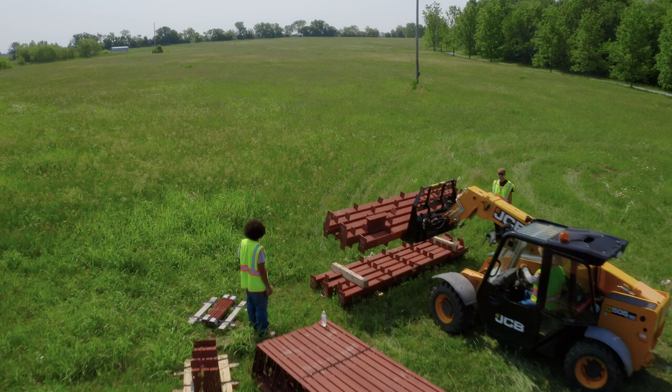Congratulations on taking delivery of your new Worldwide Steel building. We know how excited you must be to assemble your building, and it's important to pay extra attention to the next few steps to ensure your assembly goes as smoothly as possible.

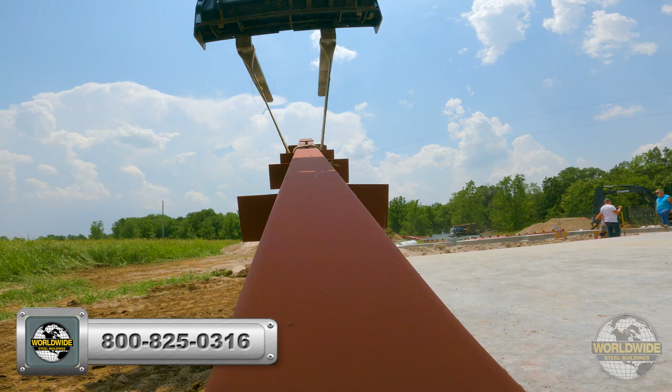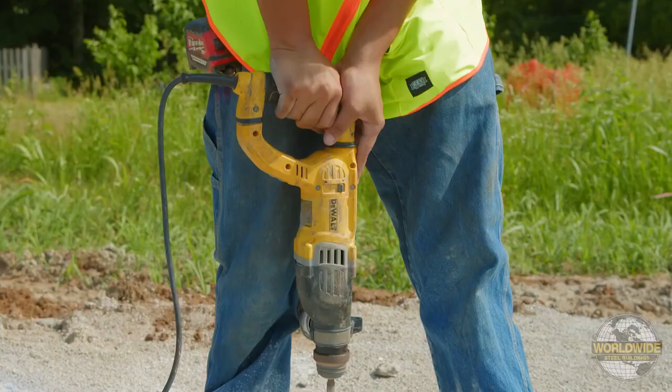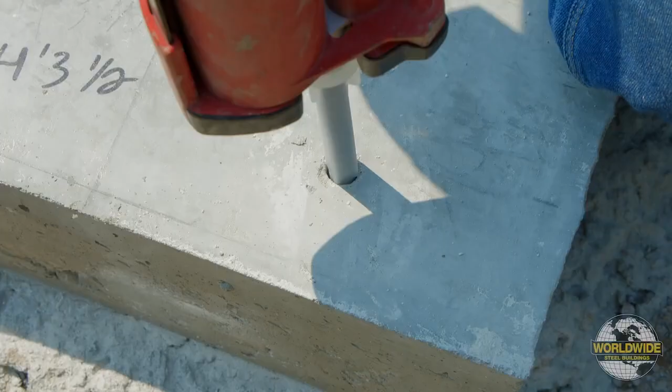The foundation is a crucial step in your building process. Your foundation engineer, whether it be Worldwide Steel or your independently contracted engineer, will determine the diameter, length, and type of anchor rod you'll need to use. Worldwide Steel does not provide anchor bolts for your project, and these must be supplied by you or your contractor.

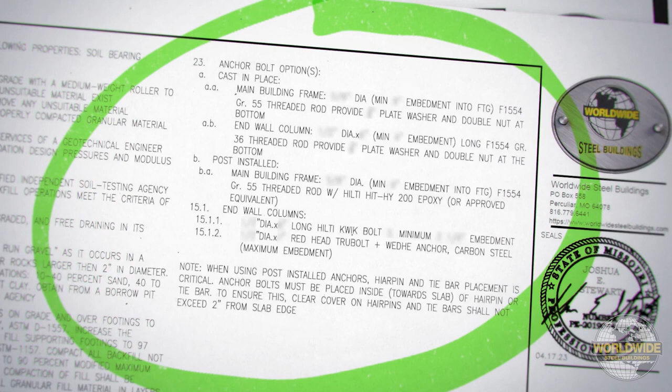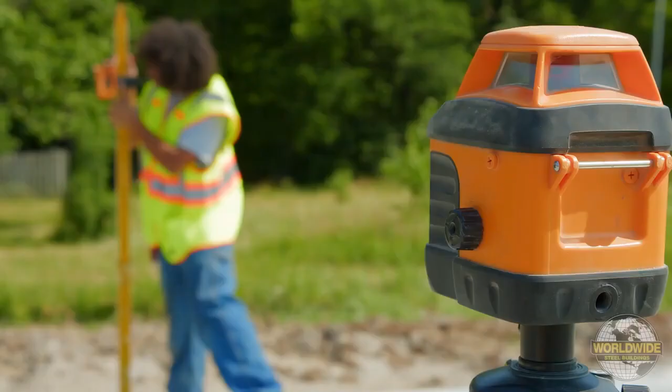For most building projects, you'll have the option for your foundation supplier to cast the anchor rods in place when pouring your concrete, or to install anchor bolts after the concrete has been poured. Your custom building has been drawn and engineered for a square and level concrete pad and/or piers. Problems with the foundation will lead to problems with assembly and poor overall building performance, so please ensure your foundation is correct before assembly.

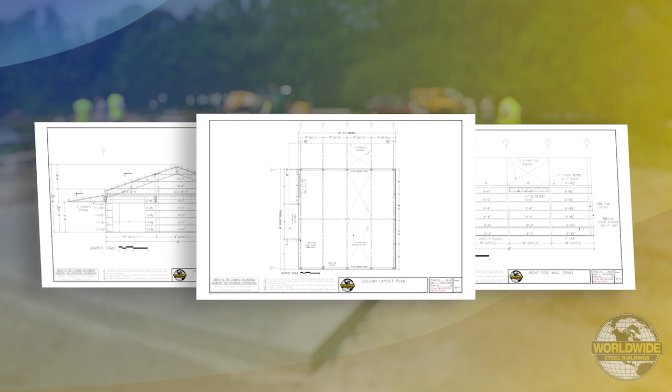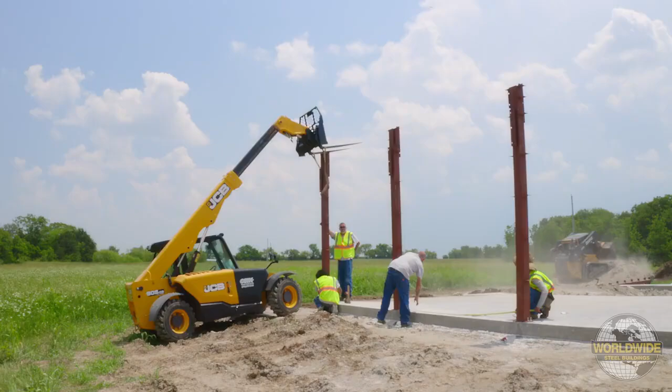The paperwork delivered with your building has all the information for the layout and components of your specific building. Remember, all buildings are custom-made to how the customer designed it. In this example, we're referencing a 40-foot by 40-foot tube leg building with post-installed anchor bolts. All buildings are drawn on a grid system, or grid lines as they're commonly referred to.

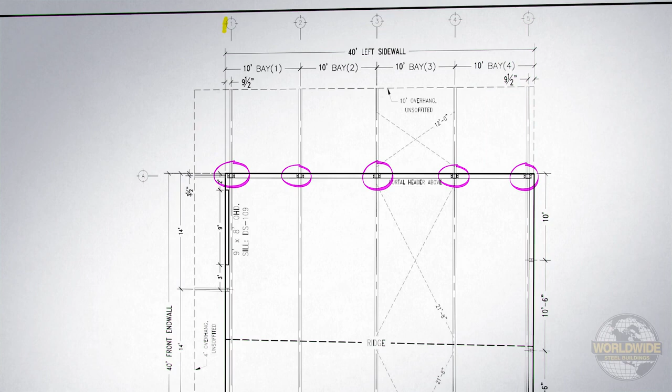When laying out your columns, the W1 drawing, or column layout plan, will give you measurements for proper column placement. Columns are labeled at the intersections of the truss lines, the numeric value highlighted in yellow, and the column lines, the alphabetic value highlighted in green. The trusses in your building kit correspond to these intersections and are labeled accordingly.

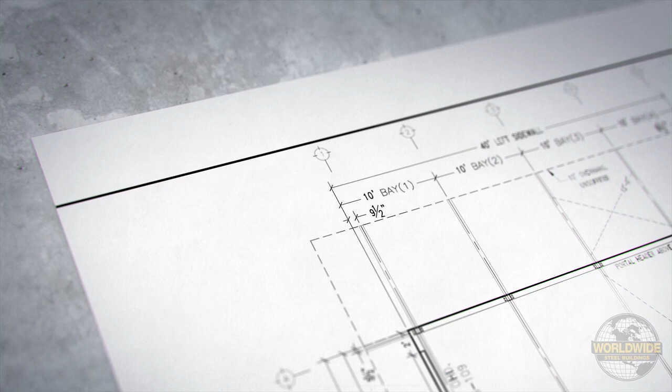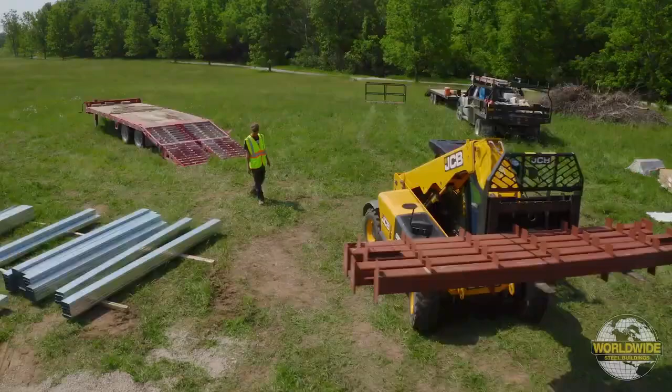The dimensions and grid lines shown on this W1 drawing represent the center line of the columns and base plates at each location. Columns that are specific to a certain grid location, such as grids A and 1, will be labeled as A1. If you receive columns with no labeling, those columns are typical and can be used at any main building column location that does not have a specific labeled column.

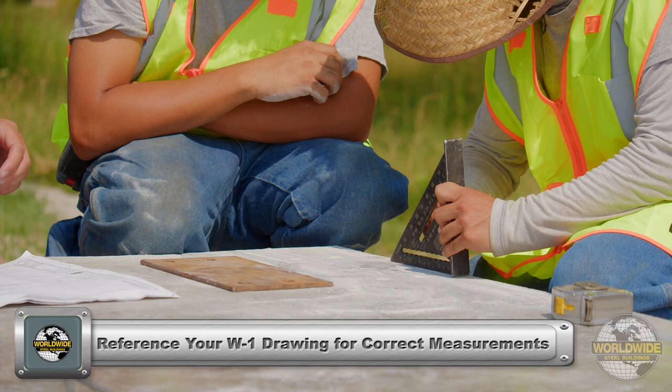For the building in this example, the measurements are as follows. Measure 1/2 inch off the sidewall edge of slab and make a mark. This will be the outside face of the tube column as well as the outside edge of the base plate. Measure 3 1/2 inches from the sidewall edge of slab and make a mark. This will be the center line or grid line of your tube column from the side wall.

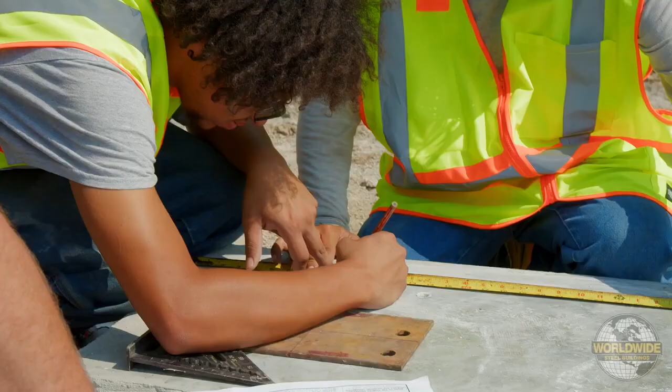Measure 9 1/2 inches from the end wall edge of slab and make a mark. This will be the center line or grid line of your tube column from the end wall. You've now identified center lines in both directions for column A1. Repeat this process for each of your building corner columns.

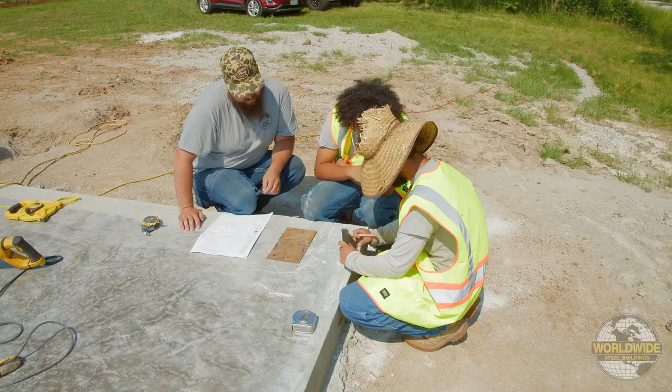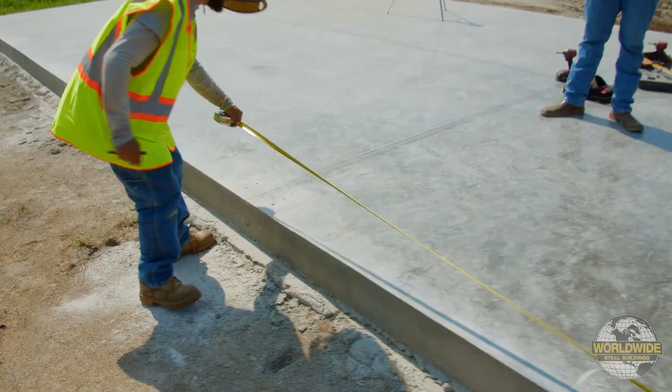To find center for the remaining columns, run a chalk line along the side wall at the 3.5 inch measurement at each corner column and snap the line. Then measure from the center line of the corner column to the center of the next column line. Per our W1 drawings, this building's dimension from 1A to 2A is 10 foot 0 inches. Mark this location on the concrete.

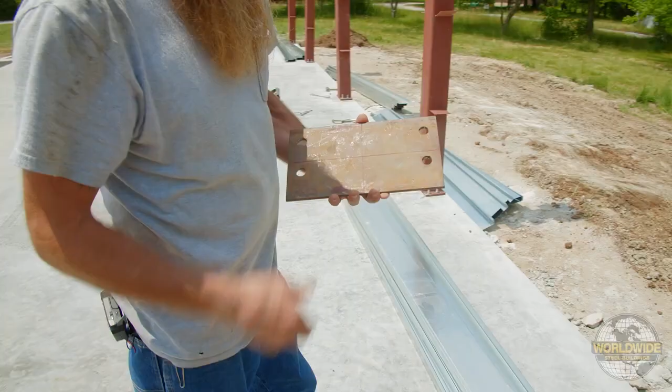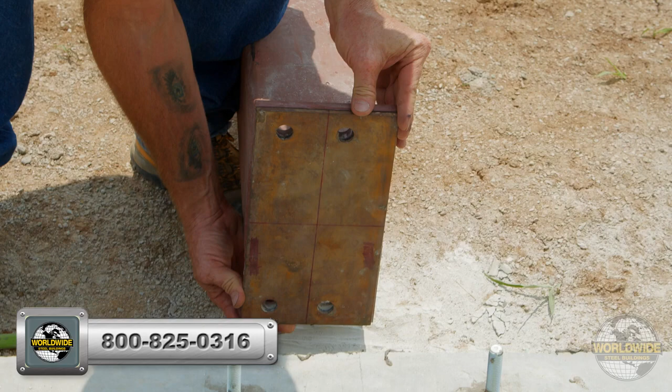We encourage the use of a template for accuracy when laying out your anchor bolt locations. Worldwide Steel does not provide this template, but it can be easily made out of plywood to match the base plate dimensions and hole locations shown on your foundation drawings. Once your measurements have been pulled, align your template to center and mark where your anchor bolt holes should go. The anchor bolt holes will align perfectly with your column holes.

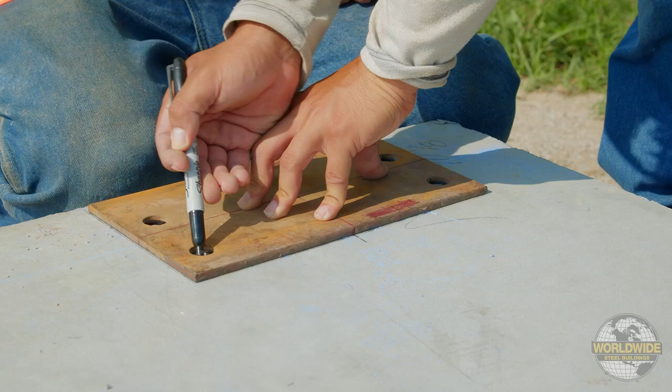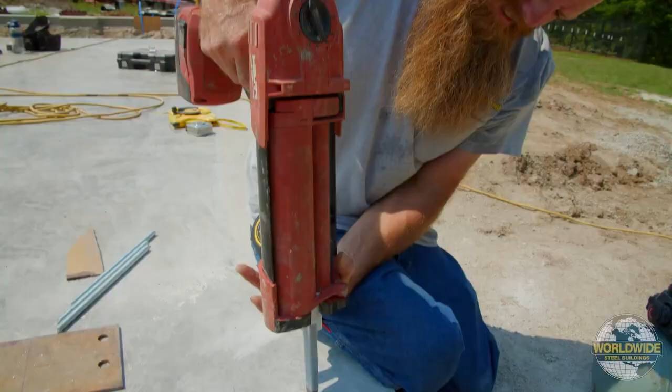At this time, remove the template and drill holes as required for anchor bolts. It's good practice to utilize compressed air to blow out any remaining dust in the drilled hole. Use the specified anchor bolts and recommended epoxy. Reference the epoxy manufacturer's instructions for the depth, diameter, and quantity of epoxy to use for each bolt.

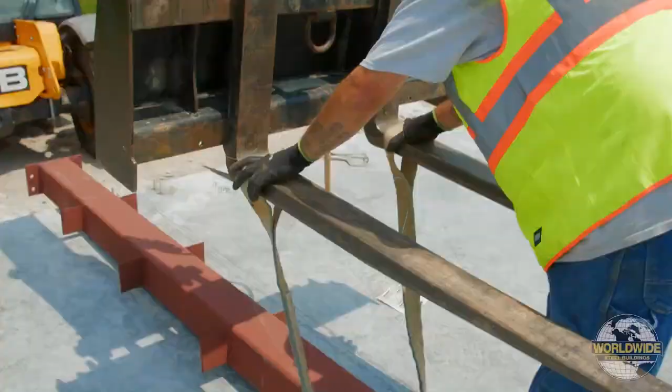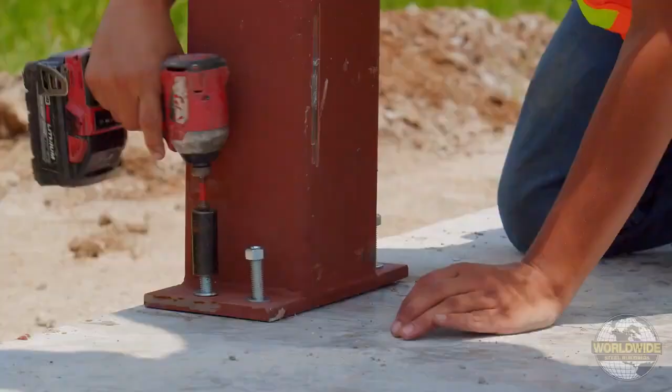Once the epoxy has cured, position the 1A column at the 1A outside corner intersection. Stand the column upright and make sure it's level and square. Once it is level and square, anchor it down. Continue anchoring the rest of your columns according to your specific W1 drawing.

Congratulations on taking the first steps to installing your new building. These steps are crucial to a successful build, so take your time, plan accordingly, and reach out to your Worldwide Steel Buildings rep if you have any questions.